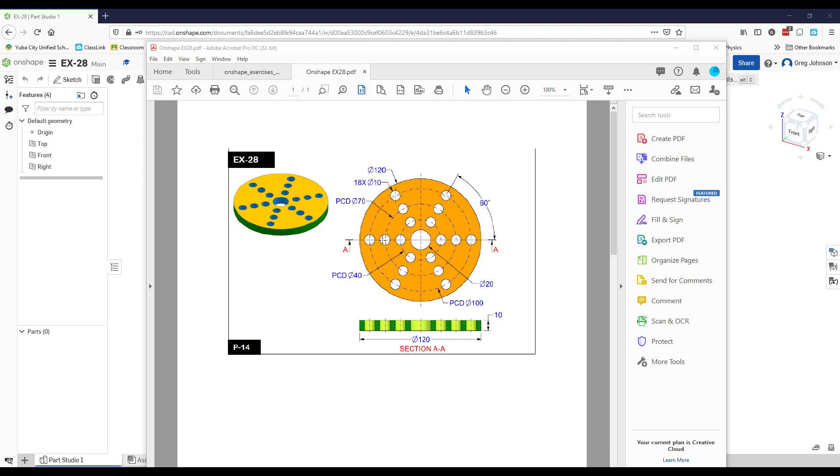So if you look at the drawing, the sizes of our diameters are 40, 70, and 100. So they're each separated by 30. So it looks to me like I could just make one hole, do a linear pattern to create the other two holes, and then do a circular pattern to create the rest of it. So that's the approach I'm going to take. So let's go ahead and do that.

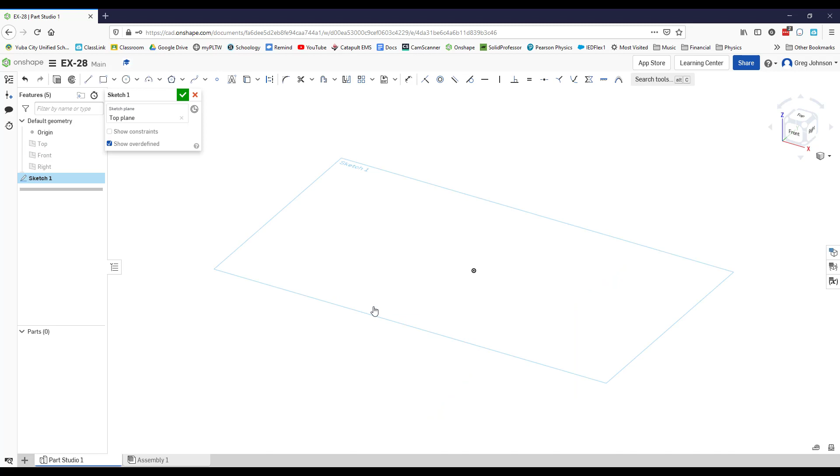So I already have a document up and running. I'm going to make my sketch on the top plane because that's the orientation I'm seeing in the isometric view on the drawing. So I'm going to make a new sketch, hide all the planes, hit N for the normal view, and let's start off with these circles. So the inner circle, according to my drawing, is 20. So I'm going to click and make that 20. My outer circle is 120. So I'm going to click and make that 120.

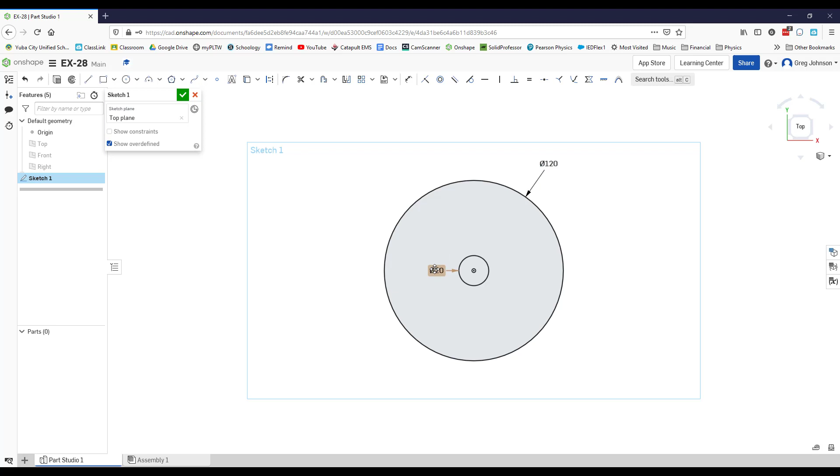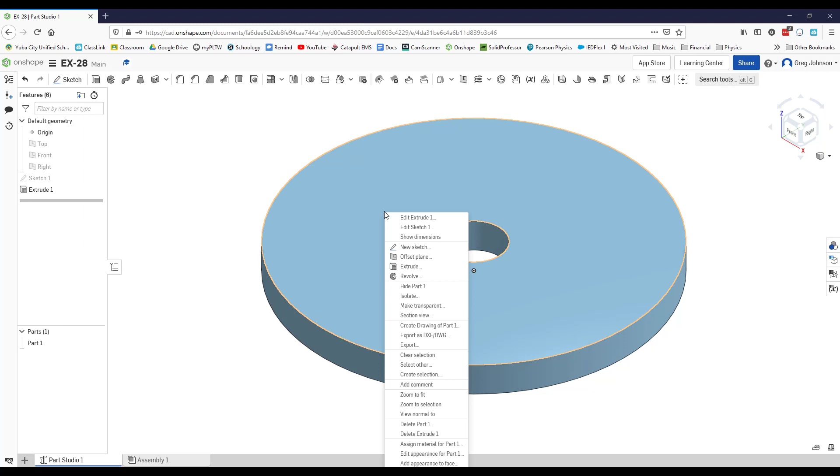And I'm going to hit escape to get out of the tool, move these out of the way, and that's all we need for our initial sketch. And I'm going to right click and select isometric to get the isometric view, and let's extrude this. And I said before the extrusion was supposed to be 10 millimeters, so let's do that, and we'll accept that. Okay, so we're off to a good start. Now I'm going to right click on the top face and make a new sketch, hit N to get that normal view, and then I'm going to back out a little bit so I can see what's going on.

Okay, so like I said, it looks like this is a linear pattern followed by a circular pattern. We did that before when we made that strainer, remember? Except that was just a lot more complicated. So I'm going to start off by making a construction circle and a construction line that connect, so I can locate this hole right here. And let's see, these holes are 10 millimeters in diameter, and so I'm going to just do that and make that one hole. So let's start off.

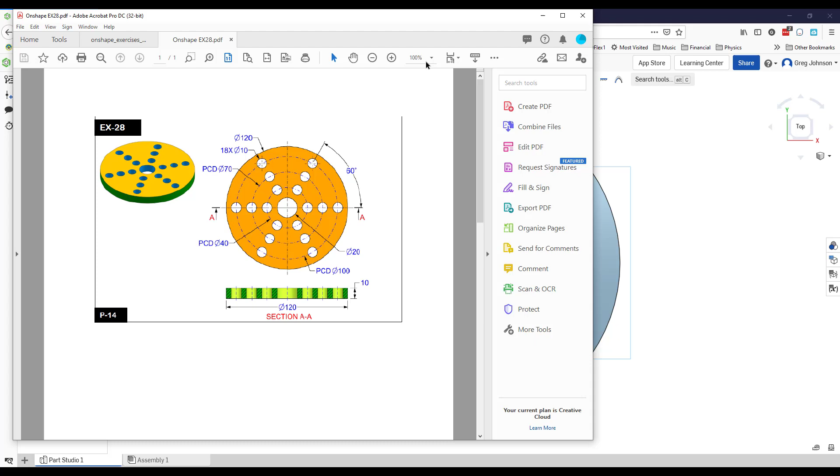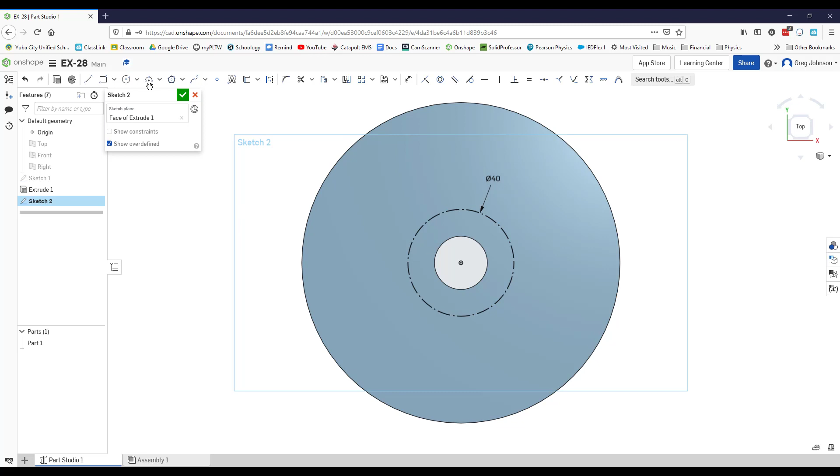So I'm going to select the circle tool and then the construction tool, and that first one has a diameter of 40. So I'm going to get over my origin there, click, make that 40, and then I'm going to hit escape. Let's move that out of the way. This time I'm going to get the line and the construction tool, and I'll come out horizontally, connect the two, and that is going to be the location of that 10 millimeter hole. So I'm going to click on the circle tool, get to where that intersection is, click it, make it 10, and that's all we need.

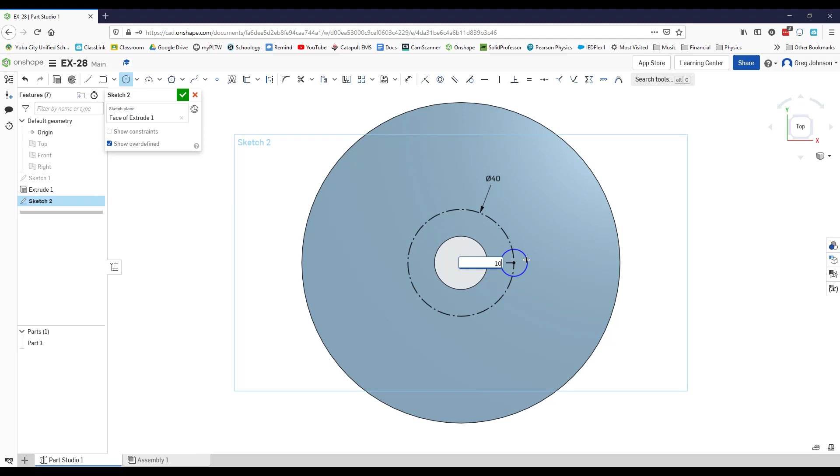So I'm going to accept the sketch, right click, go to the isometric view. I'm going to do a remove extrude of that hole, and it looks like that's already good enough, and I'm going to click. Okay, now actually, it occurs to me that I'm not going to be able to do that linear pattern. Well, let's see what happens if I show my sketch. I'm not sure if you can use a construction line from a sketch in order to get your linear pattern. Let's find out.

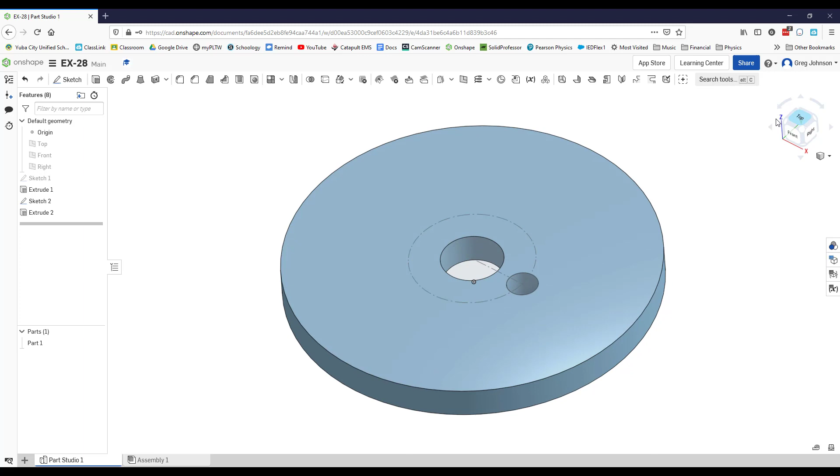So I'm actually going to get my top view so I can look at it, and I'm going to go to the linear pattern, and the entity to pattern, first of all, it needs to be a feature pattern, is extrude 2. Okay, now direction. This is where I'm not sure. I'm going to click on that line. Oh yeah, it lets me. Okay, cool. We didn't have to do anything.

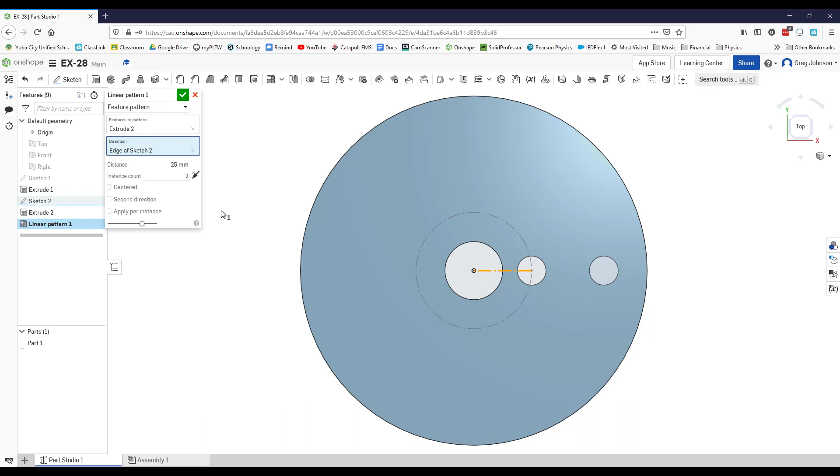Now, so the diameters went 40, 70, 100. Okay, so that means that there's a difference of 30 between each diameter, but if you're going out in one direction, you're more concerned with the radius. And if the diameter is going up by 30, the radius is going up by 15, because the radius is always half of the diameter. So I'm going to click on the distance and make it 15, and then I'm going to change the count to 3, and that looks right. Okay, so I'm going to go ahead and accept that.

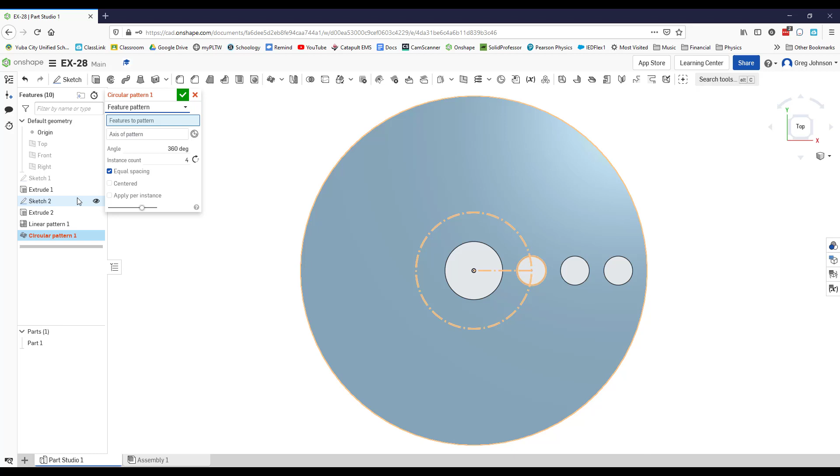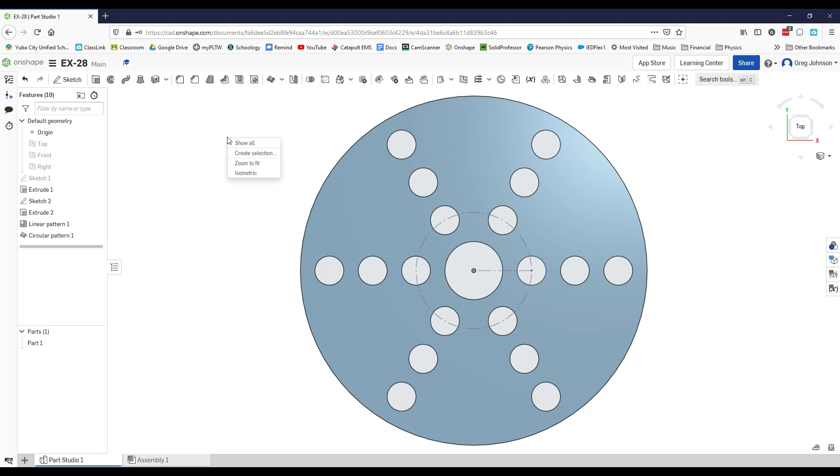And then I'm going to change this to the circular pattern, and the entities to pattern this time, we've got to make it feature pattern again. The entities to pattern would be extrude 2 and linear pattern 1. Okay, I just kind of remember this from the good old strainer that we made. And then the axis of the pattern is going to be any of the circles. And right now it's doing 4 of them, but we need 6 of them. And there you go. I'm going to click it. I'm going to make it isometric, hide that sketch again. And there's your part. Not too bad.

That was actually a fairly quick one. And that's a good way to start off the week. That's a good Monday one. All right, there you go.